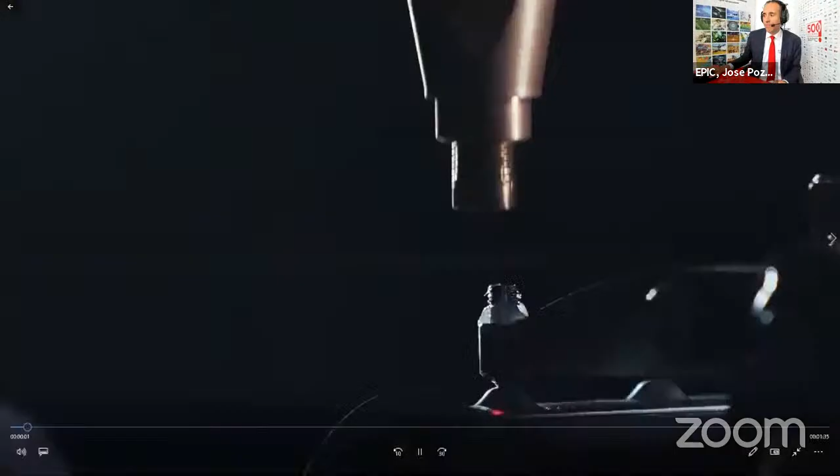Industry 4.0 is increasingly dependent on robots for high-speed, high-strength automated welding. The EPIC online meeting on Friday 19th will explore the state-of-the-art in laser beam welding. This is a topic that fascinates me. I even tried this myself. Heat is required to fuse metals. In laser beam welding, we use light. An extremely powerful laser beam strikes on the metal and melts it. But there are still many challenges.

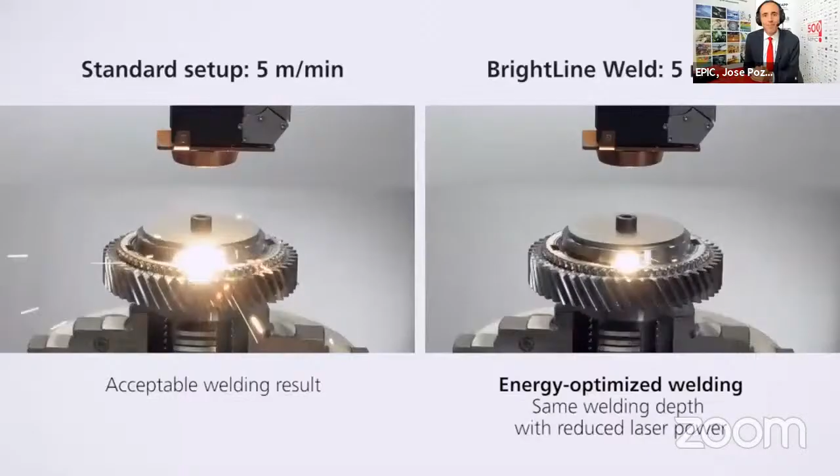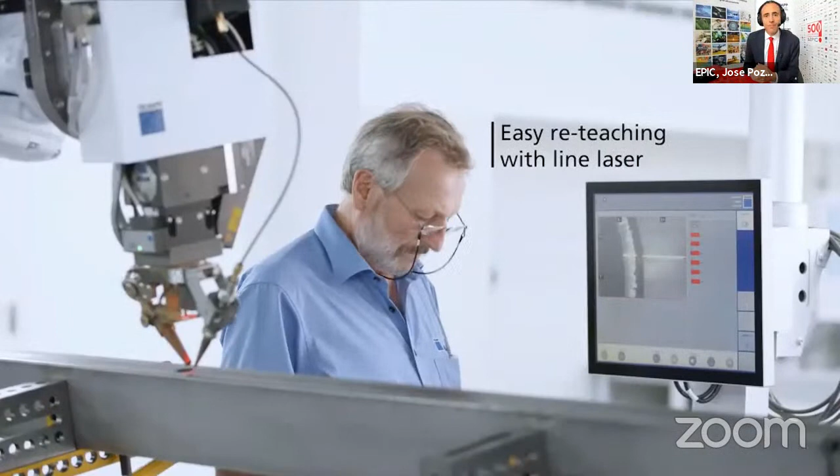For example, the use of the right beam shape for each material, the smooth welding of different materials with different cooling rates, stability, maintenance cost. So let's bring the entire supply chain on both key segments for laser welding, automotive and metallurgic industries, and let's understand what demands they have from the supply chain of photonics, from fiber to optics, from ruby lasers to YAG lasers. It is all about making business while addressing challenges.

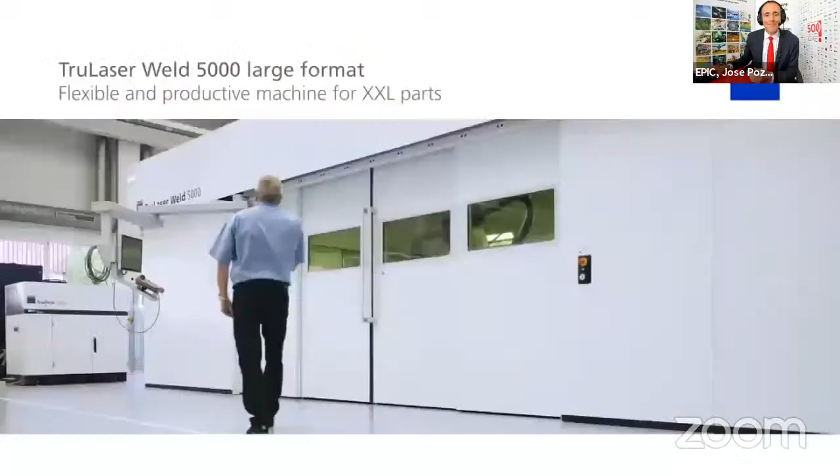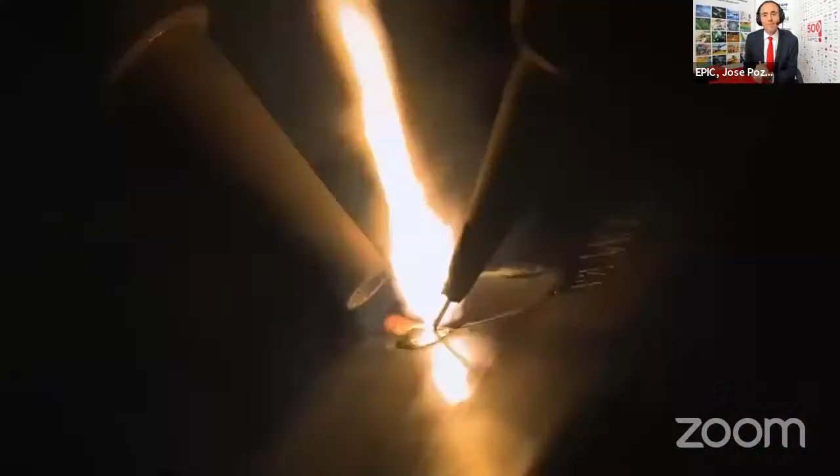This is a very important sector for photonics. I am delighted that the market leader Trumpf will be there. How will collaboration between manufacturers of lasers and beam delivery systems grow the market? Sign up to participate in Zoom or follow us live in YouTube. Be laser focused on the discussion on Friday, June 19th at 3 p.m. Central European Time.

And it is Friday, it is 3 p.m. Central European Time, and here it is in front of us, the full supply chain on laser beam welding. It's a fantastic day for me, for Francesca, and for Antonio, because as you may know, lasers fascinate us, and this is incredible to have this meeting today.

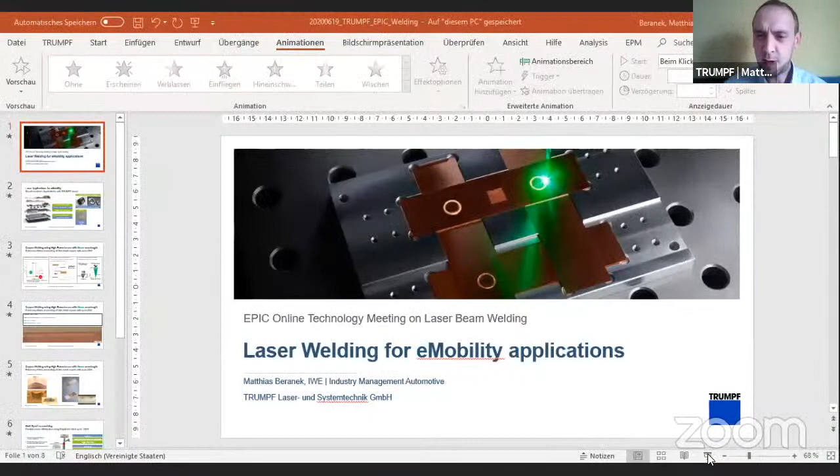All right, thank you very much. Good afternoon to everybody. I've already seen a lot of familiar faces. And also I would like to greet the attendees out there. I've learned that I only got like 6 minutes or something like that, so it will be very quick.

I just will show you what we are mainly concerned with talking about laser welding these days. As you can imagine, and a lot of you know that, there's a lot of stuff going on in e-mobility. So you can see here in the green boxes what are the main application fields, like power electronics, battery cell and module assembly, the battery container, which is actually a car body part. We have a lot to do with hairpin e-drives and also the rest of the drivetrain components. And also we are looking into fuel cells at the moment. So there's pretty much everything.

I think that there is a huge shift from what we've seen in the past, like steel and aluminum welding, to mainly copper welding. So this is something we're looking particularly into. And for that, we have elaborated a whole new laser lineup, which are the green lasers based on the disk platform by frequency doubling. Reason for that being, as you can see here, absorption of copper in that wavelength green is 40%, so it's much higher than infrared. And this gives you much better handling of those welding applications.

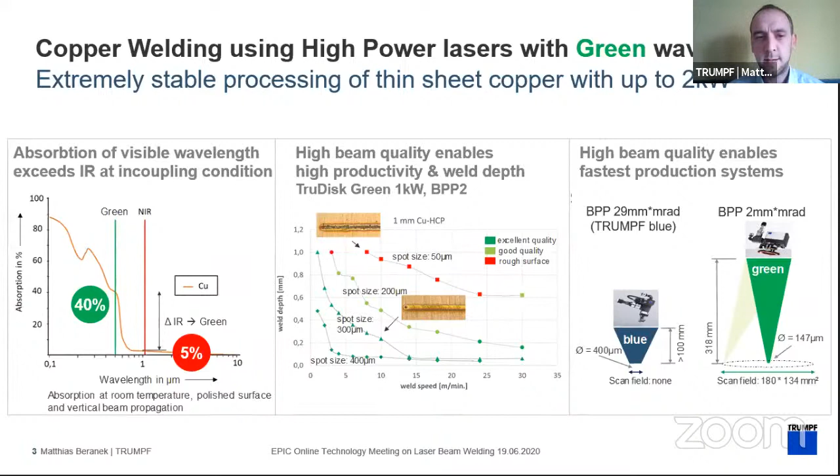And we have also found that we have to have a very high beam quality, as shown in the middle. So you can see different welding depths where we are very fast in welding, but this is only achievable having that high beam quality, which we maintain from the disk platform. And also what speaks for the high beam quality is the system technology, which is on the right side. So we've tested everything in visible wavelengths, meaning we also have a blue laser in Trumpf, but it turned out that we cannot use what we want to use, which is scanning optics for our fast processing. So high beam quality and green laser light enables and improves the copper welding applications.

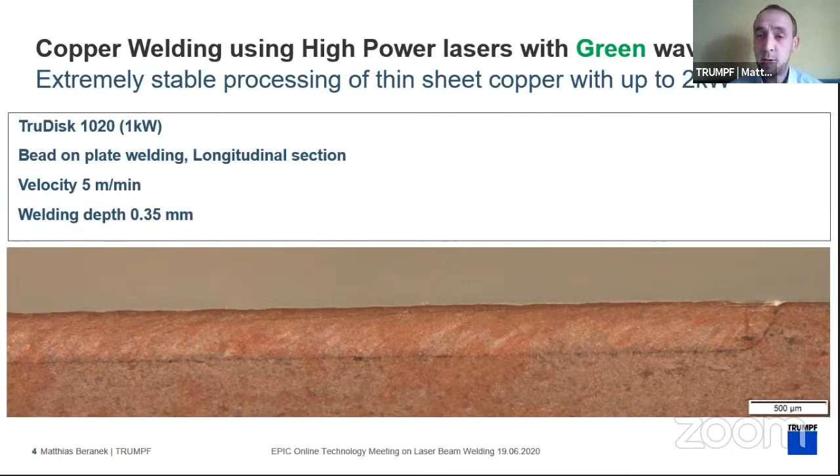We talk about comparably shallow welding depths, like in this case 0.35 millimeters in bead on plate copper, but with a very extreme stability of the welding depth. And this cannot be achieved with infrared, but only with the green one. And this is something very new. Also, we see the classical battery cell applications like foil stacks will become feasible with those green lasers, as well as the mixed metals, so aluminum with copper in that case, where we just want to have extremely stable welding depths in order to maintain that. Another major breakthrough technology is actually multi-spot laser welding.

In our case, we call it BrightLine Weld. That is the Trumpf name, and we've also originated that technology up to 16 kilowatt. As you can see, we will use a 2-in-1 fiber guide. That practically means you will be using 2 spot sizes at the same time with a certain power distribution at different sizes. The main effects of that being most notably a stabilization of the welding process, which means the keyhole dynamics, and so on. And this results typically in a significant spatter reduction, minimization.

It is suitable for all materials we see in e-mobility and, of course, other industries. In steel, we will get a high speed gain, which means exceeding 20 meter per minute, 30 meter per minute welding speeds. This is extreme and crazy what's going on here, as well as having a higher efficiency, meaning power can be reduced to achieve the same welding depth.

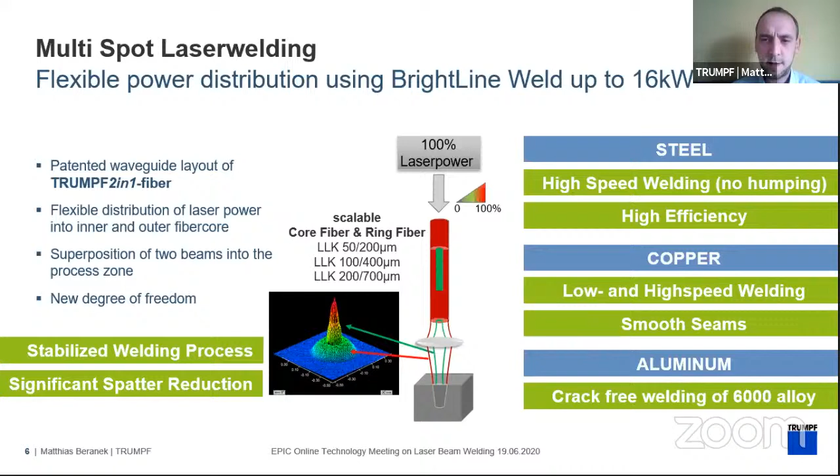And in aluminum, we've seen that we can have crack-free welds for the 6000 alloy, which a lot of people are afraid of. So this also improves that. And this is just 3 examples of what we do with BrightLine. So in comparison to the green laser, where we have heat conduction mode welding, BrightLine, especially in combination with copper, is meant for deep penetration, higher penetrations.

One thing maybe regarding the community, and this is my last sentence here, is that for most of those applications, we have to bring together multiple things, one of which is, of course, the beam source, the fiber guide, but also application know-how and sensor technology, including data handling, interpretation, making the processes smarter. And this is where we have to work together more closely in the future. And this is the path, what we will be seeing.

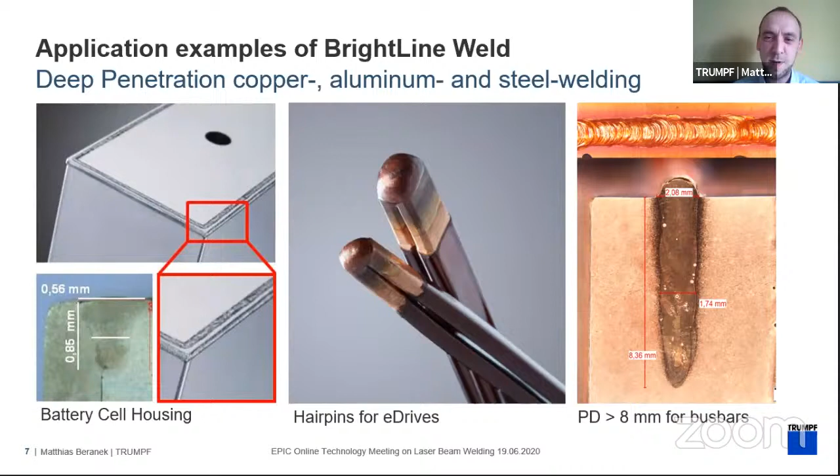So it's really clear you didn't have the typical EPIC questions, what can you do for them? What can they do for you? But you already mentioned basically the full value chain could help you. So that's already in one sentence the meaning of EPIC. So the full value chain is here. So maybe someone of these people belonging to the value chain wants to comment or ask questions to Matthias. What is it?

So now they are all shy, but then I know Rodrigo is writing something because Rodrigo is our monitoring system guy. So welcome, Rodrigo. Can we start with you, maybe to introduce yourself and say how you can help Matthias. I guess you have a couple of things to tell him.

Yeah, thank you. For those that don't know about us, we are a manufacturer of high-speed infrared cameras. We are a Spanish company. And we have cameras that are introduced in the production line to monitor welding processes in real time and to assess the quality also. We have made many collaborations in the past with many companies, especially for welding of similar and dissimilar materials. And for example, with AIMEN, we have made the integration of our camera together with a deep learning system that is capable to detect defects in real time.

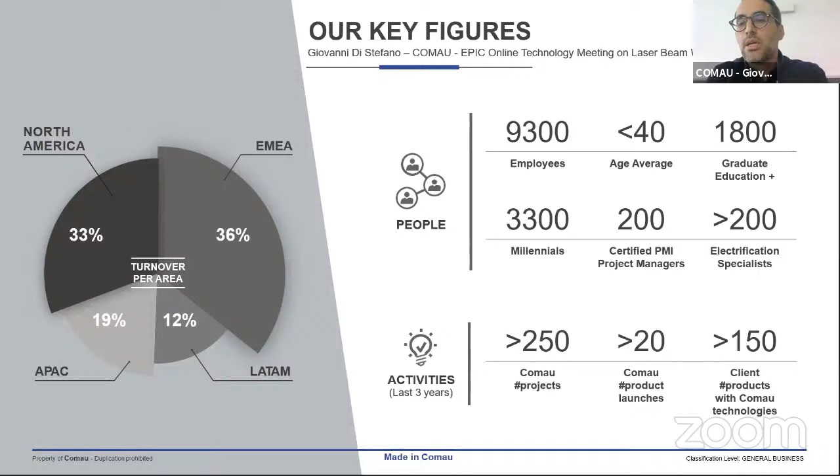For what concerns activities, we decided to share some numbers about the last 3 years that were very successful: more than 250 projects, more than 20 new products launched, and more than 150 customers with our Comau technologies.

For what concerns laser technology, we started working on it in 1985, so we have been one of the pioneers of laser technology. We worked a lot in the automotive industry, but we are trying to move forward in a more general approach.

These are sort of specific consultancy that only companies like Comau can provide. Our greatest level of expertise comes from our roots: body assembly, machining, powertrain assembly jobs. But as I said before, we are moving forward in the electrification market.

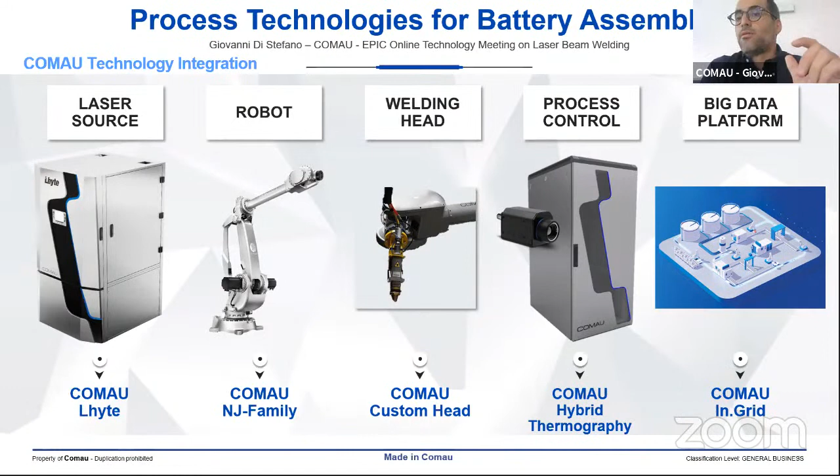Not just granting the mechanical strength of the joint, but concentrating as much as possible on the electrical performance of the joint as well. To do this in the best possible way, we decided to integrate our hybrid thermography, which comes from a huge investment we made last year by opening our own software development center in Bari.

We're working closely with the Polytechnic University of Bari to create a software house dedicated to developing new software that lets us use artificial neural networks to analyze videos collected in real time by infrared cameras. This way we can understand, without any destructive test, whether the quality of the joint is good or not, granting good mechanical performance as well as electrical performance.

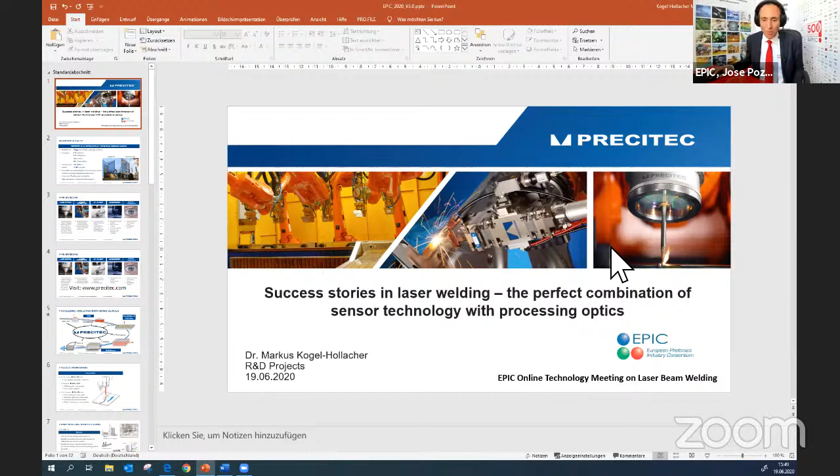Thank you very much. As you may see, this is my first Zoom conference, we typically use different tools nowadays. Let's start with the topic of this afternoon, which I want to present to you: some success stories in laser welding, and to show what is important. And important is the combination of sensor technology with processing optics.

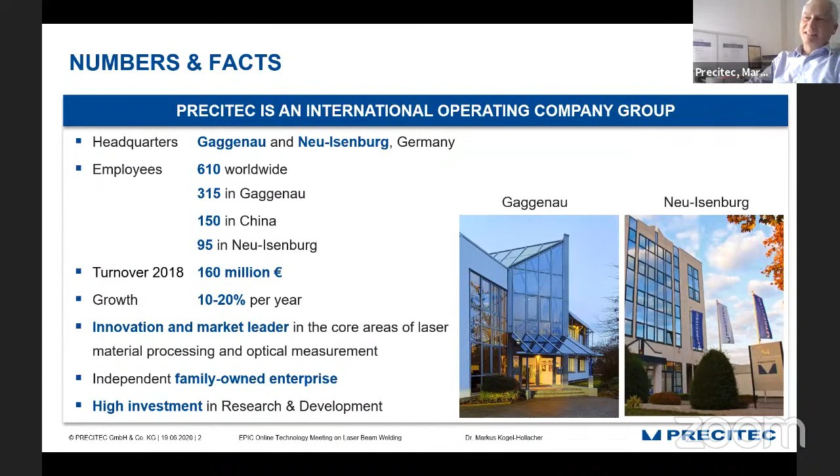Just a few words about Precitec in 2020, or 2019 more or less. You see that we have nowadays 610 people working for Precitec worldwide, so this is quite impressive. If I remember the days 25 years ago when I started here, it's completely different from these days. And yes, we have a quite respectable turnover and growth like everybody. Let's see what happens in 2020, the numbers for this year will be different. Nevertheless, this is what we are working on.

I don't want to talk too much on that because it's definitely easier for you to go on our website and see the divisions Precitec is active in. Just to let you know, we are two companies in Germany: one in the region of Karlsruhe, which does the laser materials processing stuff, and the other one in Frankfurt, which does measurement stuff and medical technologies. And so what I do is bring both expertises together.

So let's start also with a very important subject these days, which is e-mobility. We as laser people, we as people in the photonics industry, we are quite happy to have that challenge nowadays, because we do not have to compete that much with existing technologies. We can design applications right from scratch with the laser as a tool, and with sensor technology to supervise, to control these processes. And you see, this is more or less the content of my talk.

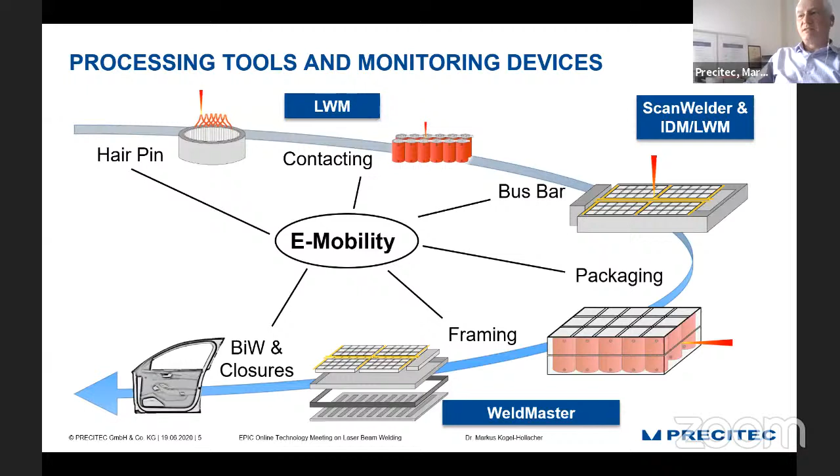I want to go from the top to the bottom to bring a few ideas on laser processes in hairpin, in contacting, in busbar welding, packaging, and also body in white applications to you, where we already have running applications. You will see that not for all the applications I'm allowed to tell you the customer behind, but in the end you will see a few of the customers at least which we are working on. So we think at Precitec we do have a solution for all these applications in e-mobility.

So let's start with the topic of process monitoring. The devices, the tools we have developed over the years are highlighted in blue here. They are called WeldMaster, they are called IDM, LWM. These are the systems and the names we gave to the systems. And those who are familiar with laser processing and also familiar with process monitoring know that we divide the process region into pre-, in- and post-process regions. So these are the areas where we can apply the sensor technologies to.

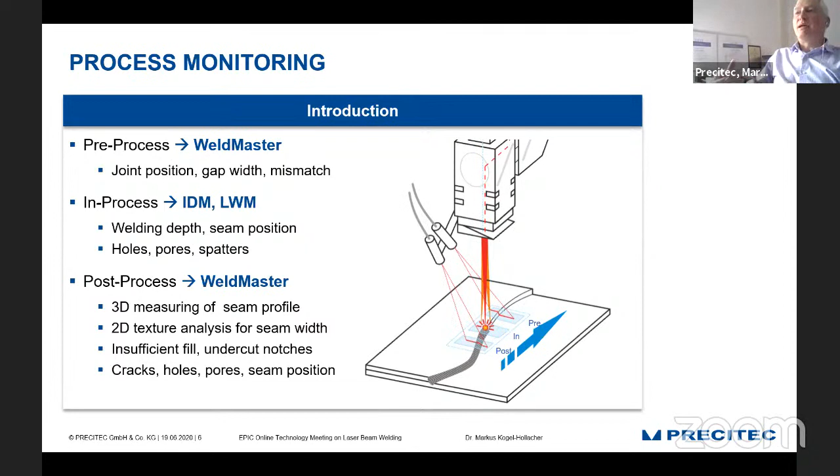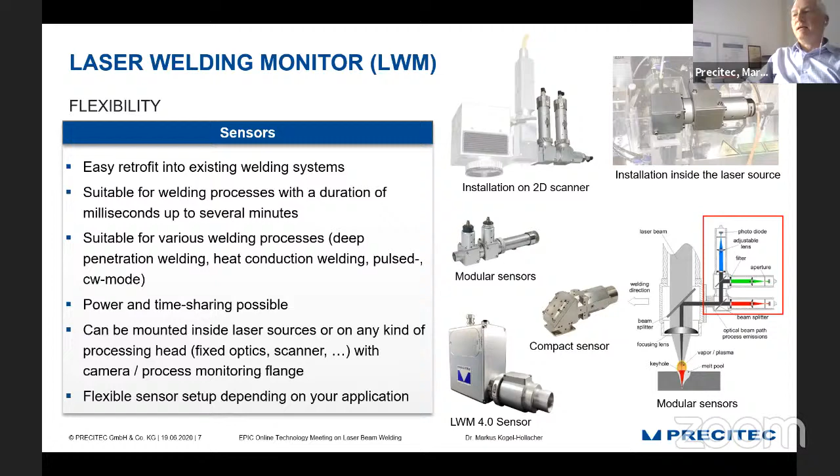Let's start with the LWM, laser welding monitor, all-time favorite, a rebirth more or less of that sensor technology. Just started a few years ago. We have a lot of applications running right now with the old-fashioned sensor technology based on photodiodes. Nevertheless, it's quite easy to retrofit existing welding applications, welding systems with this sensor technology. And we are the ones which try to bring more than one sensor into these applications, sensors covering different areas of the wavelength band in order to see more than just one possible failure, one possible error which can occur during the welding process.

And just one application in battery contact welding: you see the laser welding monitor mounted on a third-party scanner. And additionally, you have the camera port, so it's possible to also adapt any kind of camera, for example NIT cameras, to these devices. The application behind is in production since 2018. As I said, I cannot tell you the customer behind, but for those who are familiar with battery contact welding, it's not that surprising that it's copper to aluminum or copper to stainless steel welding or aluminum to copper.

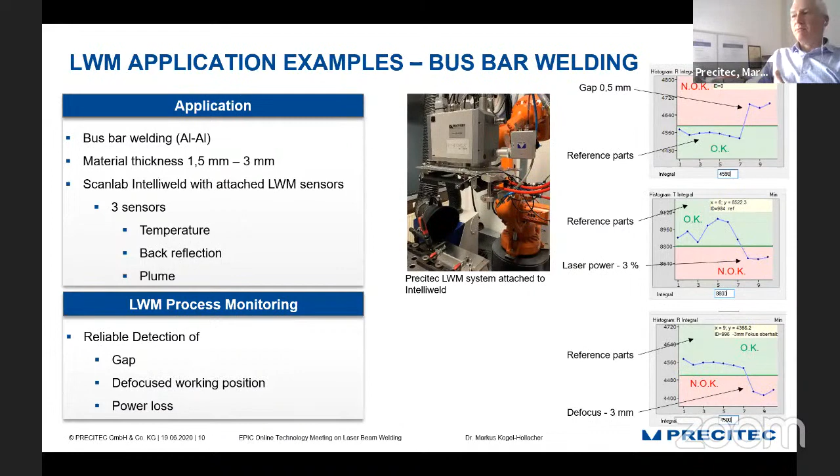Another application is busbar welding. What you see here is a little bit underneath the surface of the laser welding monitor, where we have a lot of statistics, and you see here three typical problems which can occur in these applications. It's a gap between the sheets. It's a laser power drop, which can occur, as was mentioned before, because of contaminated protection glasses, or a defocusing, which happens because of misalignment of the part. And you see that different sensors, in this case temperature and back reflection sensors, can catch these errors very dominantly, and can distinguish good from bad parts.

We also already talked about coating. Coating is very important, not only when it comes to different colors of the laser sources. It also is important when it comes to different sensor technologies, which use specific wavelength bands for their supervision. So that's why coating is a very, very important topic these days, also when it comes to monitoring devices.

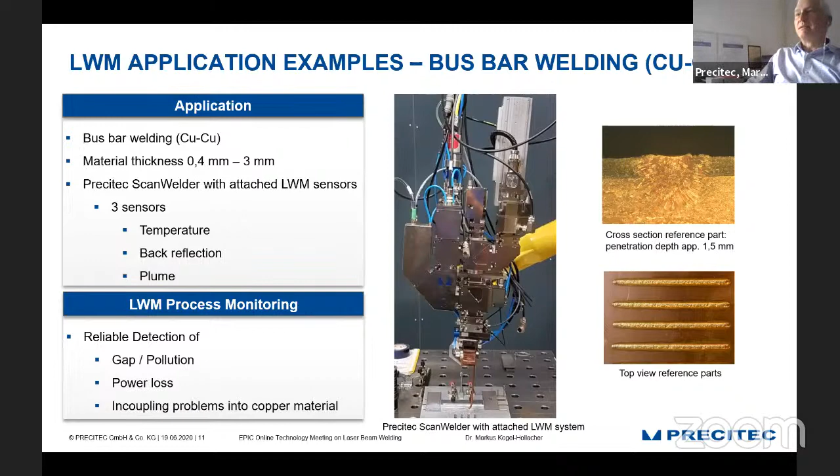One of the monitoring devices which has to come in presentations I do is the use of OCT technology in laser applications. In Precitec, the sensor is called IDM, in-process depth meter. When we started with that technology, we thought maybe it's important for customers to know the penetration depth. What we see right now is that penetration depth is important, but not the most important thing you can do with OCT technology. Nevertheless, what I will show here are just a few examples of penetration depth measurement.

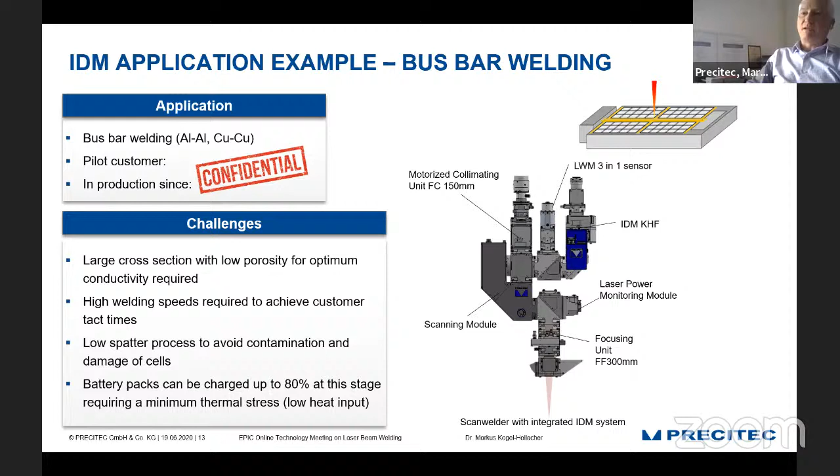So again, busbar welding, again the scan welder of Precitec in combination with the OCT sensor, and a device which we call keyhole finder. This is a new device which comes with the OCT system to align the sensor spot, the measuring spot. You have to be aware of the fact that we are talking about a diameter of the measuring beam of about 50 to 70 micrometers. And the alignment of that measuring beam is very, very important. That's why we need some devices to help the customer align that measuring beam to the right position.

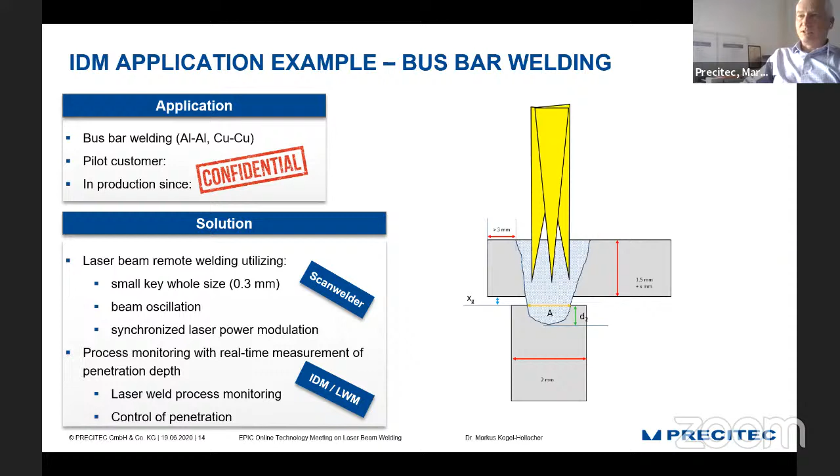And you see here in the busbar welding, we can easily do some penetration depth measurement. Even if the keyhole is very small, even if the penetration depth is very small, we can adapt that OCT technology to these applications. You see here aluminum to aluminum or copper to copper. So what is very important to know is that the process emissions do not disturb the measurement. And we can measure penetration depth or topography or whatever you use the OCT sensor for in micrometer resolution.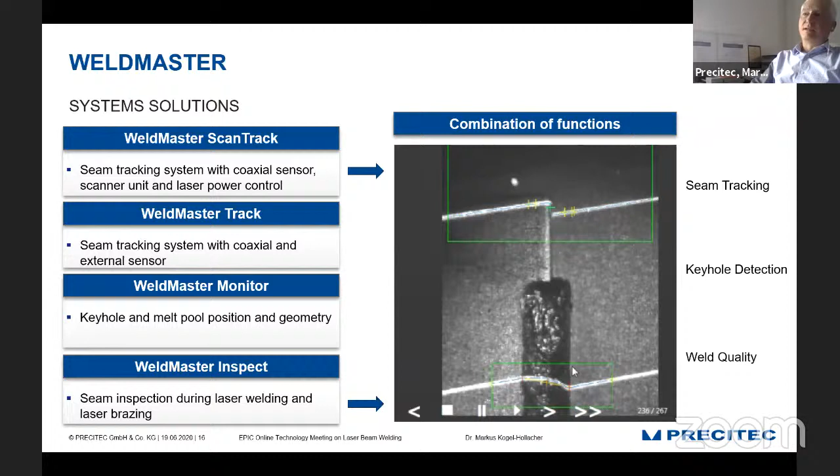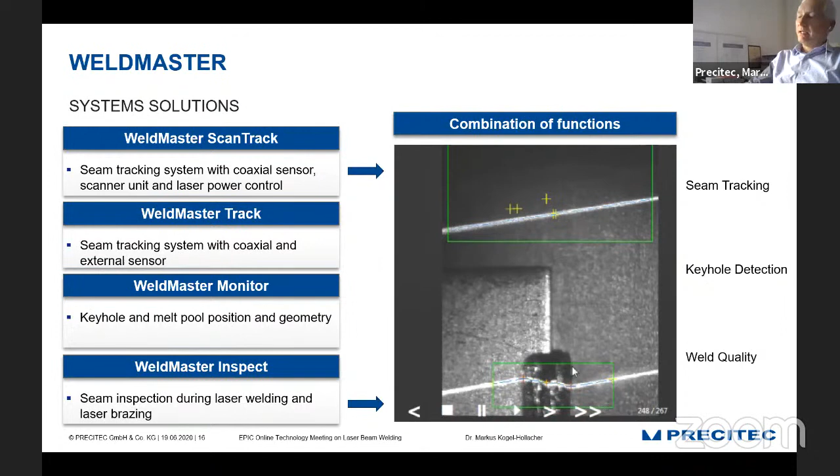Now it comes to the last device, what we call WeldMaster. This is a camera device which is looking coaxially to the laser beam. What you see here in the video is the view directly into the interaction zone, which comes with two projected laser lines which do seam tracking or weld quality topography measurement. This all is the WeldMaster system, which you see here in a sketch. So again, a Precitec own-built device with a 1D scanner. And what we can do easily with that 1D scanner is to oscillate the laser beam.

Those who are a little bit familiar with laser welding know that some of the applications need a stable keyhole, and you can stabilize the keyhole by very fast oscillation of the laser beam. And also, if you do lap welding, what is displayed here, it sometimes helps if the gap is varying that you are able to oscillate the laser beam in order to bring some material from the top sheet to the bottom sheet. And this all is possible with the WeldMaster ScanTrack with all the inspection and monitoring systems.

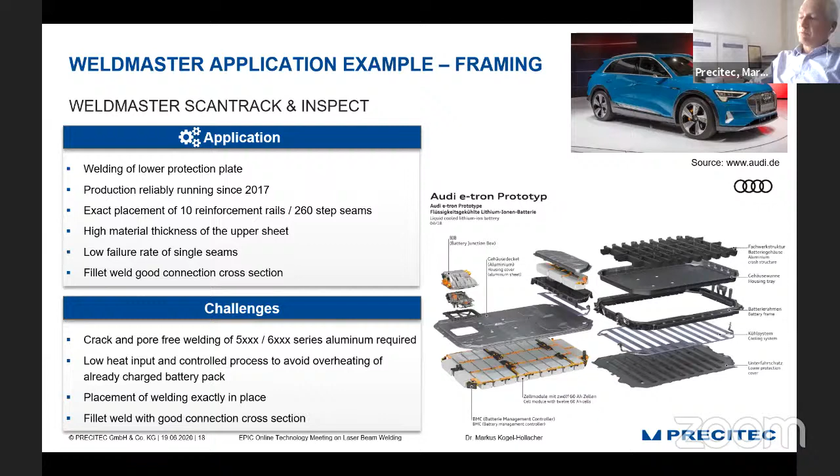And the customer behind is Audi. We have one application running since 2017 where we use that device in e-mobility to close the battery cell module, which is mounted underneath the Audi e-tron. You see here in the application, it's 5000 to 6000 series aluminum, and that requires some oscillation of the laser beam and some controlled process power input. That's why we not only oscillate the laser beam, we also control the laser power. This is what we do since 2014 also on the Audi A8 doors. This is also 6000 series, and by oscillation of the laser beam, we can do pore-free and crack-free welding. And what is very important, there is no additional material, no filler wire needed in that application.

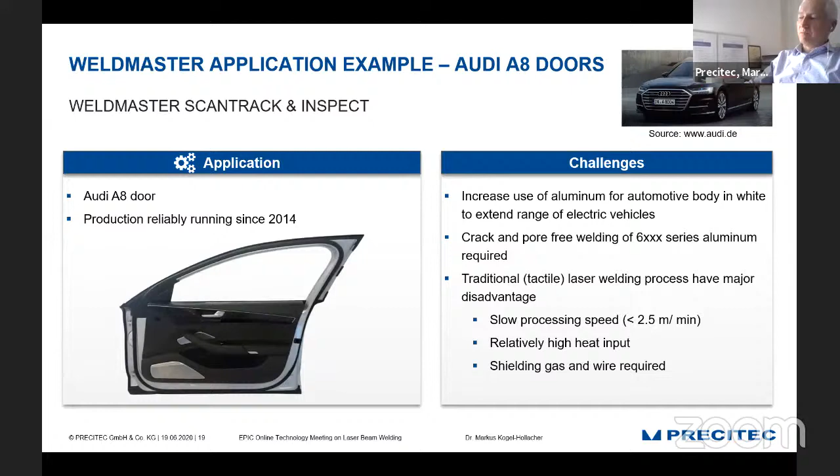So these are the customer benefits which come with that application, which was presented several times by Mr. Weberpals from Audi, with the use of the oscillation and getting rid of filler wire. There is a heat reduction of 47%. The reduction of the investment cost is quite remarkable. Running costs can be saved, and there's a lot of time saving. And additionally, by using the inline control of the WeldMaster system, there's no additional station needed for a quality check.

So just to close my presentation, some messages for you, hopefully to take away and to remember longer than this afternoon. We see that there is a high diversity in laser concepts, and these specific applications ask for specific laser usage and specific processing components. And we as Precitec see that modular design of turnkey systems is the solution which we can provide to customers.

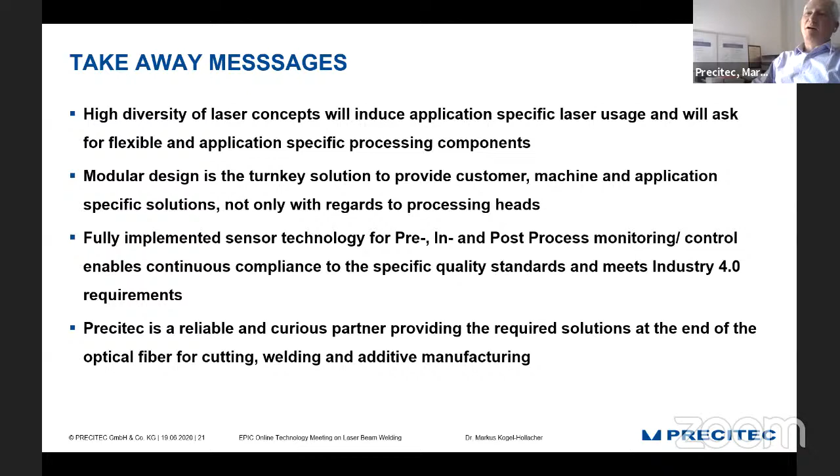As we are able to fully implement sensor technology for all the important regions, pre-, in-, and post-process regions, we can help customers to really bring very high quality standards in their application, which also meet Industry 4.0 requirements. And we still see our company as a reliable and curious partner, providing the required system technology at the end of the optical fiber. So any laser manufacturing company is happy to work with Precitec components.

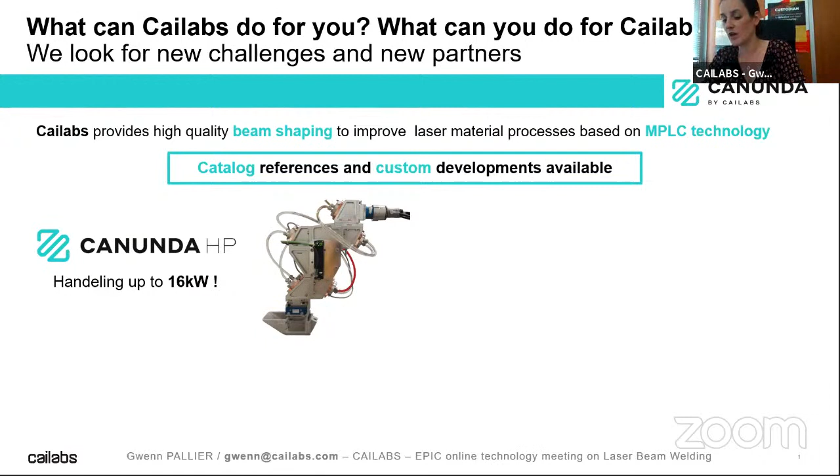Well, basically, we are looking for new challenges. And I'm very sure that actually Markus has many in his head. We are looking for end users who want to try new kinds of shapes to improve the processes, or who want to collaborate within very large projects. So if Francesca, you allow me, I will have one question now for Markus. Markus, you do a lot of R&D at Precitec, and you are always trying to improve all the processes with new features. What would you expect from laser beam shaping to bring to laser beam welding?

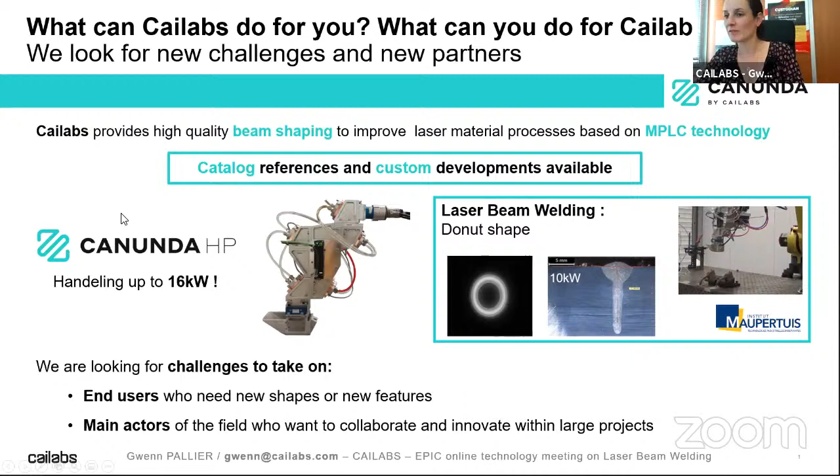Gwenn, for those who don't know that Cailabs and Precitec are working together, they can come to a different webinar on Monday.

So I always say that there are the research institutes, and we do have some research institutes here in the group today as well. Research institutes are the ones who are responsible for programming some kind of GPS system for photons. So the research institutes have to say, what is the best position for the photons to hit the workpiece surface? And Cailabs is the one who is taking over that information from the research institute, building the MPLC system in order to fulfill the demands of the research institutes. And that MPLC system is adapted to a Precitec welding head, and then we fulfill all the important applications which are coming today or in the future.

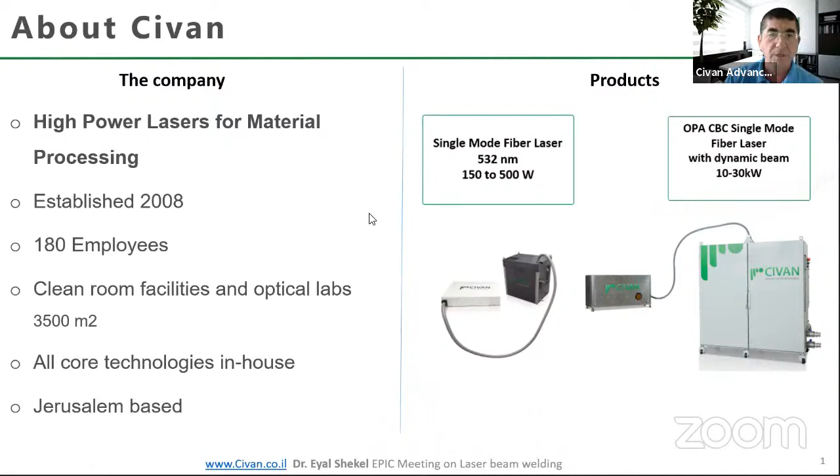So really the core technology is coherent beam combining, which means that we can take many amplifiers and combine them together to have one single mode output. But in addition to the fact that it's single mode, we also have control of the beam position, beam shape, beam focal distance, and so on, because we're using a technology called optical phased array. Optical phased array means that many lasers are shining together on a common far field, and in the far field you create a diffraction pattern that by controlling the relative phases, you actually control the shape and position of this output beam. So this output beam is a single mode output, but the position, shape, focal distance, and so on can be changed.

So here you can see a few examples of just any arbitrary shape that one would like to do. We're showing here some shapes that many people are doing, like the wobble, the H shape, a circle with some intensity in the middle, but then you can have 1 point, 2 points, 3 points, 4 points, 5 points, really any arbitrary shape. And just to show that, we show here our logo at the 14 kilowatts output. And of course, I don't have to explain too much the importance of this beam shaping and beam wobbling. So I just show here a few examples from our application lab showing different cross sections of bead-on-plate with different beam shapes.

So the way we are different than any other method of beam shaping is, first of all, we can do any arbitrary beam shape. It's absolutely, so to speak, random access. Whatever you can draw on a piece of paper, we can get close to, at least in the shape. I'll show in the next slide something about this. We can change the frequency of oscillation. So for example, if you want to do a wobble, you can do it at kilohertz or you can do it at megahertz. And all you have to do is choose on the computer what speed you want, and it happens.

Another very interesting thing is that all these changes between different beam shapes and different focal distances can be done on the fly. So if you're drilling two materials and want to go from one to the other through the interface, you can change the beam shape every microsecond. You drill with one beam shape in one material, adjust the parameters through the interface, and then change again in the other material. And of course, for welding and cutting, it's the same idea.

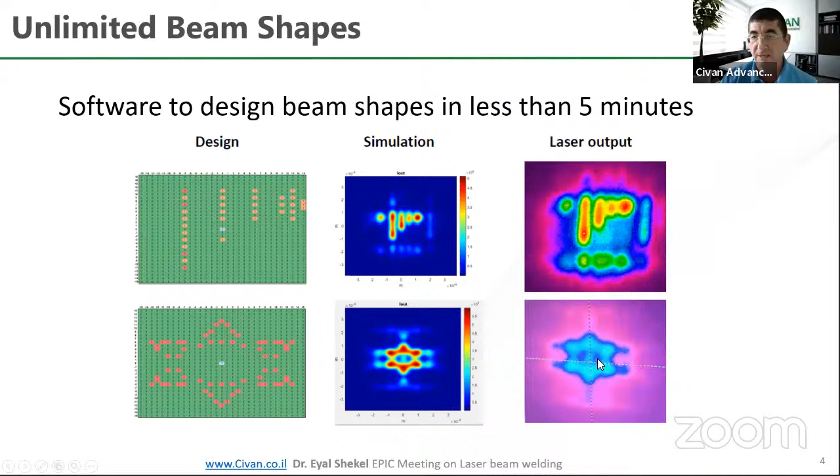For example, you can see here our logo, the way we designed it compared to the simulation. You see there are lights in places we didn't want them, but at least you know in advance what the beam will look like. Here you see it at 14 kilowatts, very similar to the simulation. And here's another example, the Star of David - you do the design, get the simulation, and in real life you get a very similar result to the simulation.

The point is, I don't have to tell this audience that every specific process and every specific material needs a different beam shape. Cutting is different than welding, thick material versus thin material, stainless steel, aluminum, titanium - any material needs something else, and every process needs something else, because maybe it's a crack sensitive material, maybe different parameters you have to control.

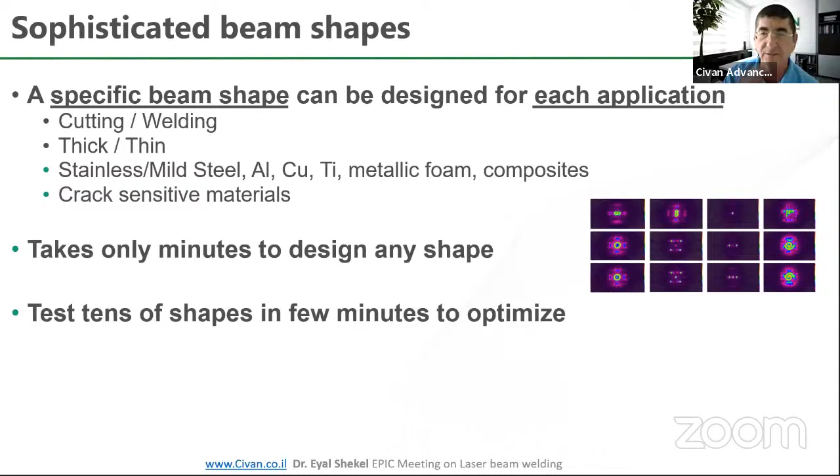But the point is, with our laser, it only takes minutes to design any shape you want, and then you can really do tens of shapes. You design the shape, put it in the menu of our laser, and with a pull-down menu you can choose any shape. In a matter of minutes, you can test tens of different beam shapes - no need to change any optics, no need to change any mechanics. Just by pressing a button, you change the shape, change the frequency, and so on.

So this is for designing processes, and of course, maybe in the future, some of the things that Precitec mentioned - you can do on-the-fly monitoring, and because we can do on-the-fly beam shaping and change all the parameters, you can actually in real time close the loop. As you monitor the process, you can actually change the beam parameters on the fly to improve the process.

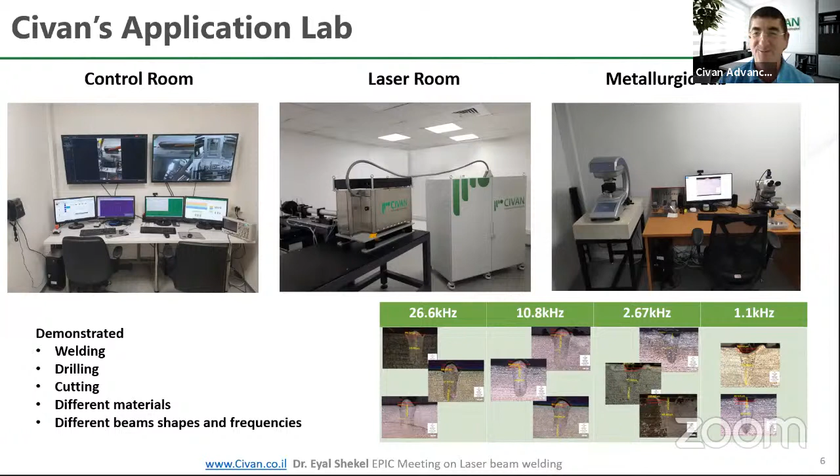It's fascinating, your spatial light modulation is just out of this world. I was impressed - I really cannot believe what you can do with a beam shape. Are there any questions for Civan?

Because I really want you to meet some of my friends, you have to come more often to the EPIC meetings, and I have to go more often to Israel. As soon as things go back to normal, I'm going there. I want you to meet the people I have in the specialty fiber business. I'm going to go to France, to my favorite guys from iXblue.

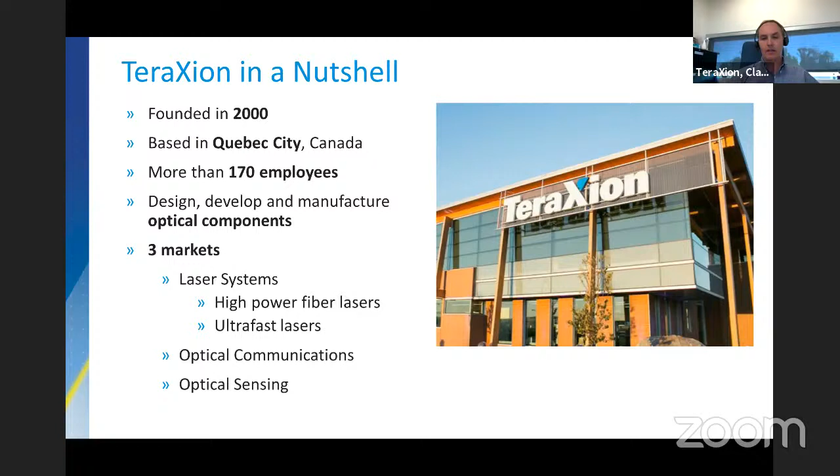And also we have activities in optical sensing with specialty semiconductor lasers and specialty filters. We provide components for LiDAR, wind sensing, and autonomous vehicles as well. We have three main technological expertise: we are experts in fiber Bragg gratings, that's our main technology that founded the company; we later acquired expertise in low noise lasers, semiconductor lasers, ultra narrow lasers, and highly stabilized lasers; and we also have a sizable chunk of our activities in integrated photonics.

Now, for the high power fiber lasers, which is where we're a player in the welding industry, I will assume that a lot of you know these configurations, but also that some of you might not be so familiar with it. So in high power fiber lasers, the basic building blocks combine these single cavity configurations.

We combine several of them to output the high level of power that were mentioned earlier in other talks. So a single cavity can go up to 2 or 3 kilowatts.

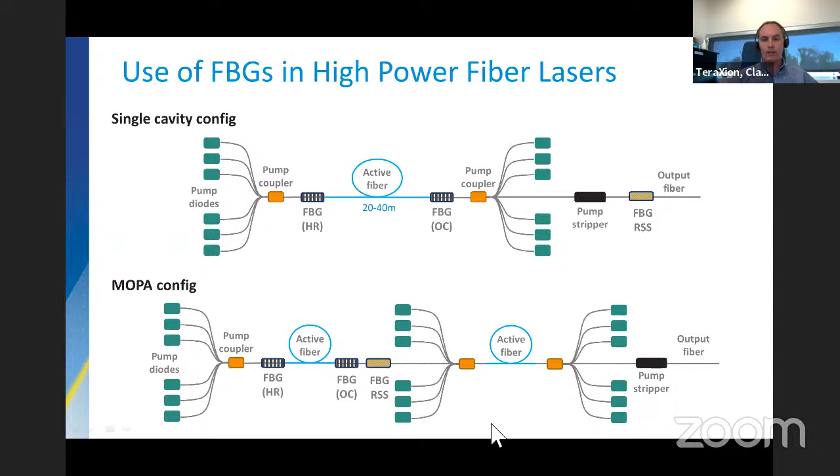What are the challenges in the high power fiber lasers? If we take it on the industry process requirement side, the industry is always seeking highest throughput per dollar, and what is required of the laser is to have low dollar per watt in essence, and that's where we have benefits with the Raman suppressing filter.

When you reach the high power, you run into nonlinear limits with the Raman scattering. To address this limitation, by suppressing the Raman, you can increase the output of your cavity without having to go to, in some cases, more single cavities combined together. So in essence, you can use fewer single cavities to get to the final output.

Another industrial process requirement is, and this is something that was addressed today by several presenters, the processing stability, which is key for the welding. And at the laser requirement level, it needs to have high power stability and also high beam pointing stability.

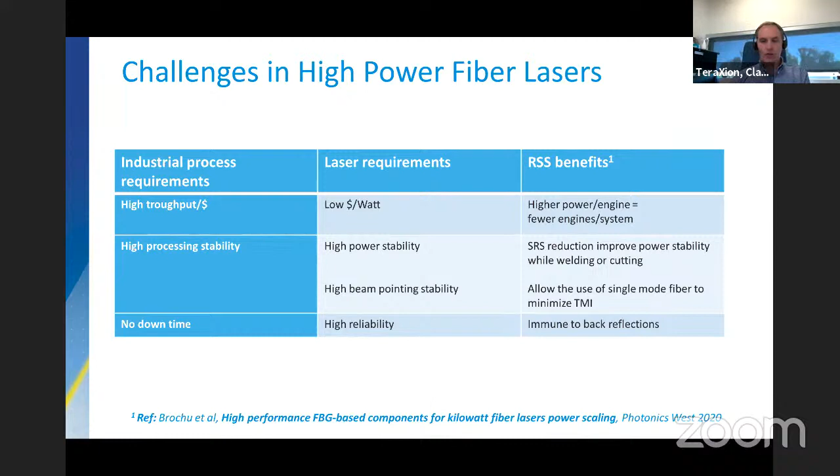The high power component, when we look at the fiber Bragg grating themselves as a reflector in a cavity, the products we're designing and manufacturing have the capability of handling power up to 3 kilowatts depending on the fiber type. We're working with different popular wavelengths: 1 micron for ytterbium lasers, 1.5 for erbium, and 2 micron for thulium lasers.

We also work with different fiber types and diameters. We work with cladding diameters from 125 to 700 micron, and even outside of these, but those are the most common ones that we are a player in.

The Raman scattering suppressor, as I mentioned, enables the power scaling of your laser by outputting the unwanted wavelength of the Raman outside of the core of the fiber, and by doing so, it will improve your laser stability, since the Raman band will use up some of your desired wavelength as a pump to the Raman.

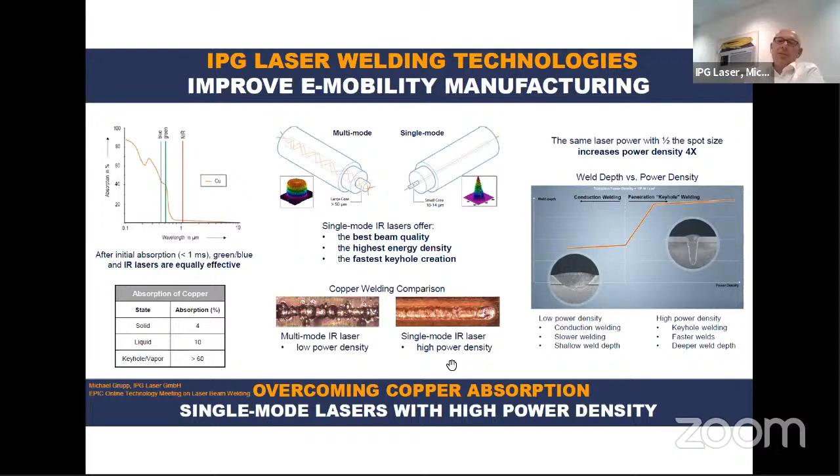So we can create here keyhole depths of a few tenths of millimeters up to a few millimeters, 3 to 4 millimeters. Thank you. Next slide, please.

So this was the one technology, the single mode lasers, and the other technology I already mentioned is our new technology of the adjustable mode beam. So we get a very broad range of beam profiles. This means we can separately adjust the power in the ring. We can separately adjust the power in the core and play with these parameters to optimize our process. In this way, we can create wider weld beads, narrow weld beads. We can increase the quality of the weld seams. We can create really high-speed welding, and we can get consistent welding in thick and thin copper.

Another option to optimize this weld quality, which is always the main key in copper welding, is to apply dynamic beam shaping. Dynamic beam shaping means that we apply scanning heads or wobble heads to move the beam very fast. It is known that a fast movement of the laser beam stabilizes processes in copper welding. And this is what we can do in a very limited space, for example, in a small circle or small lines, to get really reliable high-speed welds on these highly reflective materials or dissimilar materials.

So we get very aesthetic finishes of the welds, for example, for sealing of battery cases, for connecting battery tabs to the battery cell, and stuff like that. So this is really consistent, very stable processes at very high speed by means of the scanner. So we can produce, for example, several tens of welds within 1 second on a cylindrical battery cell.

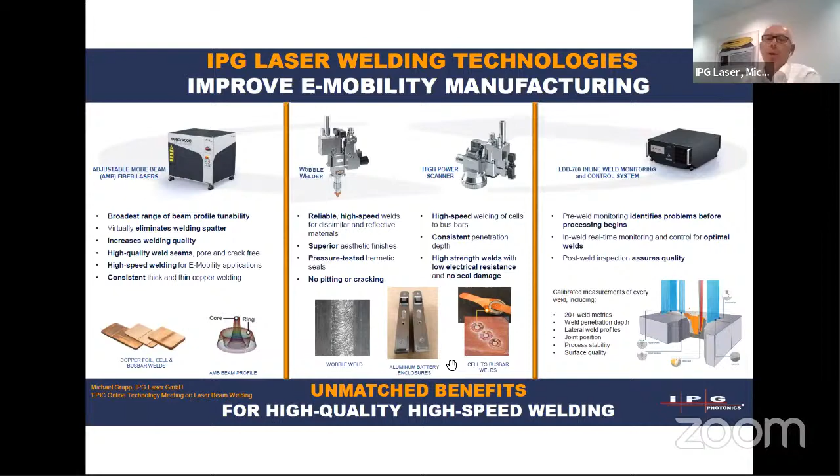So if we summarize all this, we have quite a nice technology with available lasers. As I said before, the initial absorption rate of our adjustable mode beam laser, but also of our single mode beam lasers in the infrared, is much lower than for green and blue lasers. But as soon as we get a keyhole created, we have the same stability and, let's say, the same absorption for the wavelength. But when we use the infrared technology, this is a proven technology.

These are lasers which are produced in really high numbers. The initial cost, that means the cost of ownership, the investment costs, are quite low compared to this new technology of the green lasers, of the blue lasers. These are field proven and reliable technology. For 10 to 20 years we have had these lasers in production. We can scale the power from a few watts up to 25 kilowatts. All is available, with different beam qualities.

We can create very high welding speed as we have a lot of laser power available. We get deep penetration, very high penetrations, as we can have very high power rating and high beam quality. We can control the interface by our scanning technologies or by our AMB technologies. And we have a lot of available standard laser components. This means welding heads, scanning heads, and other technologies, which are mainly optimized for the infrared wavelength. This is all available. There's nothing new, nothing which has to be invented.

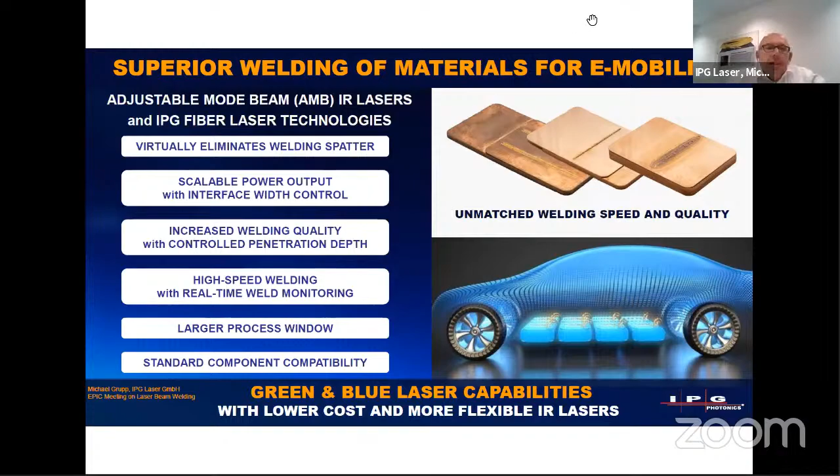Thank you very much, Michael. That was a great presentation. This is your EPIC re-entry. You've been here before, but this is your EPIC re-entry. EPIC has changed a little bit. Now it's about cooperations, collaborations, working together. What can you do for them? What can they do for you?

Yes, what can we do for you? As IPG, we can, of course, demonstrate our systems to you. We can give you the opportunity to visit us, to test our optics, to test our lasers. We have the full range of beam sources in our application labs worldwide, so you are always welcome to make tests together with us. What can you do for us? Of course, you can support us with your technologies, your optics, your devices, to serve our customers, to make processes better, to make our customers happy.

And your customers are already very, very happy. You have great lasers. One thing I would like to ask you is to select one challenge for this audience, one thing where you think, if I finish this meeting with a potential cooperation on this aspect, I'm going to start a great weekend. That's not so easy to say one thing. I think it's a great opportunity to have all these specialists and experts together, to know each other, maybe to see each other for the very first time, and make communication and relationships easier. And after the meeting, I'm going to make a lot of introductions, and people are going to get to know each other. I'm going to introduce you to a very good friend of mine. Ciao, Fabrizio. Come va? How are you doing today?

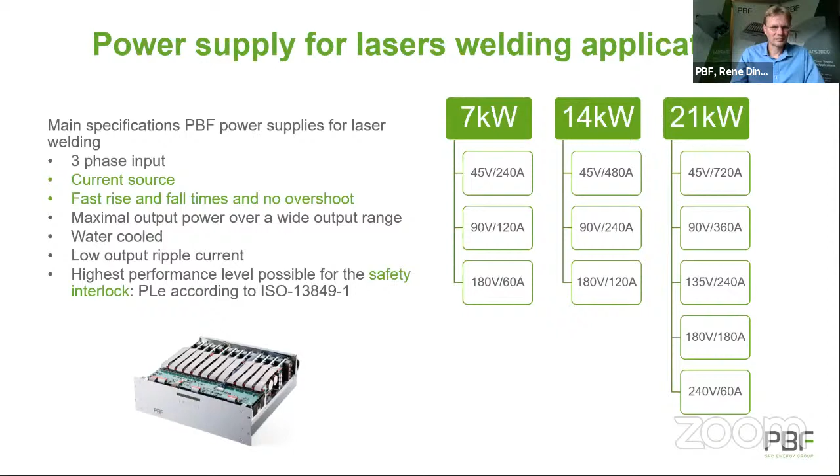As I mentioned, we have a safety interlock integrated in our power supply. And first I'd like to show you how many of you probably do it right now. You have a big contactor, and probably you have two because of the high level of safety that you want to achieve on your system. And you have a sensor that can be a door sensor, a push button, or a computer, whatever, telling the e-stop relay that you have to power off your system.

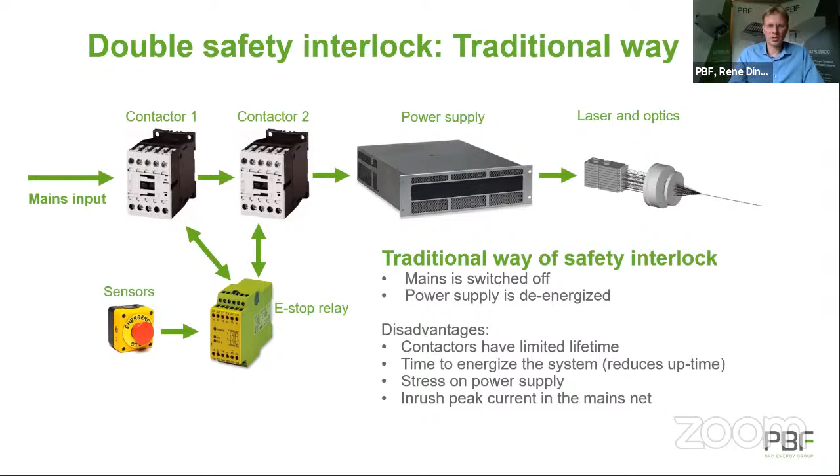There's also the PBF way of the interlock. We have integrated the interlock in our power supply, so you don't need the contactors anymore. And it's even possible to do it without a safety relay because we have the PLe system inside. What are the main benefits? Like I said, no contactors. And you now have a very short time to energize or de-energize your system. This doesn't take seconds, but a couple of milliseconds now. So the uptime of your system can improve quite a lot.

You don't have inrush spikes anymore on the net because the main buffer inside the power supply remains powered. So there's no need for inrush anymore. And like I said, it is even possible to also get rid of the e-stop relay, but that is really dependent on how you build up your system.

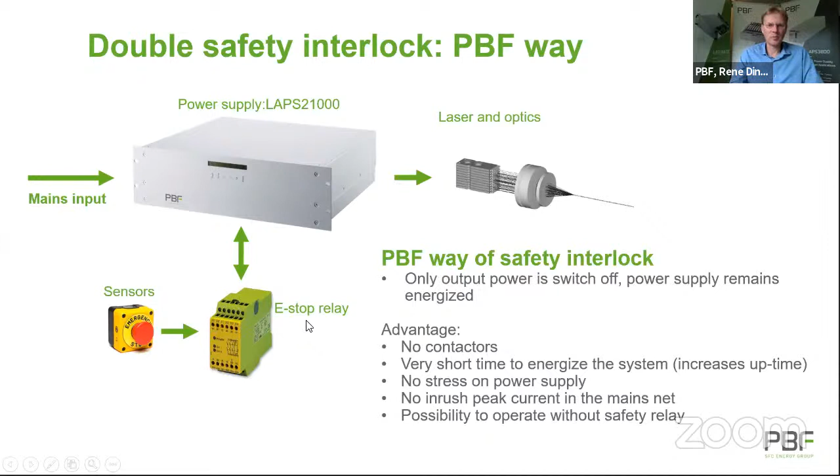Focusing a bit more on a few of our products, for instance, the LAPS 3800. As you can see, it's a base plate power supply, but you can mount it on a water cooled plate. We can deliver it both with or without a plate. It's specially designed for pulse loads, and it has three-phase universal mains. And when we say three-phase universal mains, we mean without any derating. So from 180 volt phase-to-phase to 530 volt, you can use the full power.

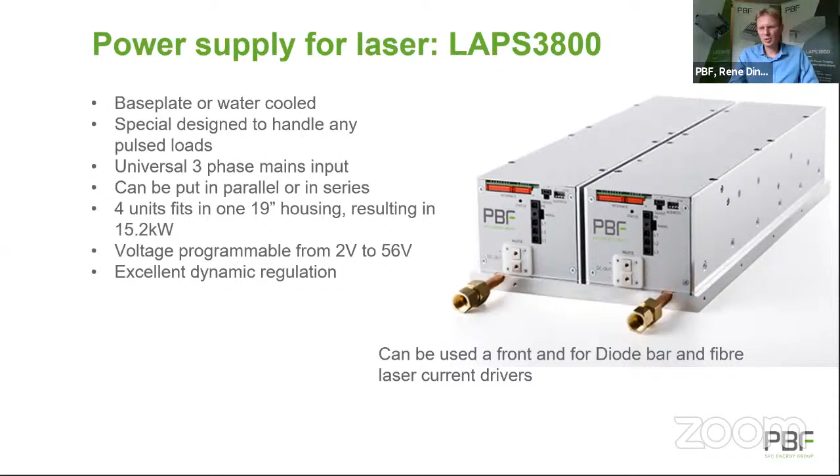You can put them in parallel or in series to either increase the current or raise the voltage. And in this example, now we have two, but if we put 4 of them in parallel, you have in one 19-inch more than 15 kilowatt. You can program the output voltage, and it has an excellent dynamic behavior. That helps you design your own current drivers and makes your design much easier. So this power supply is typically used as a front end, and you have to put your own laser drivers behind it.

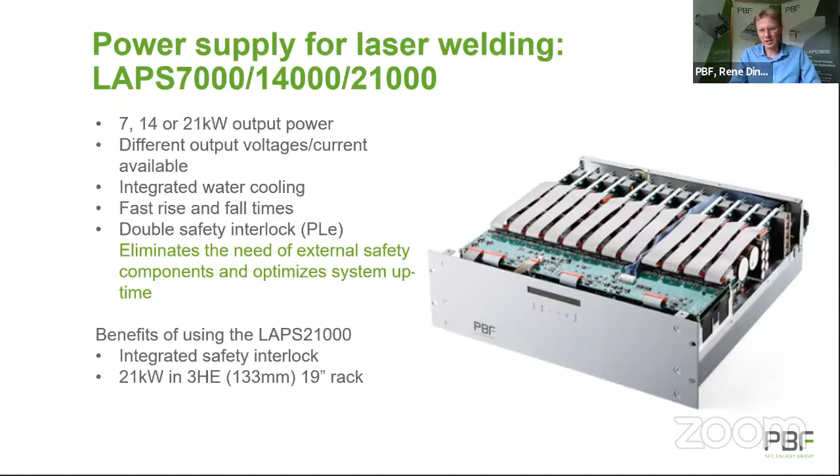Another supply on the other end is, like I showed you, the 14,000 or 21,000 watt power supply. It's available in different voltage and current configurations, water cooled, has fast rise and fall times, and a double safety interlock. As I showed you in previous slides, that can reduce external safety components and optimizes the uptime. So yeah, this is basically some of our products. We have much more, but you can always contact us or look at the website.

And basically now we come to the part where they want to ask questions or not. Yes, very good. Thanks a lot, René, for your contribution. So this is definitely a product for laser manufacturers, so for the core of our systems. So if someone has some questions for René, we can take them, some comments.

So if it's not the case, maybe it's time we could go to OPTOPRIM. We have 2 representatives here, so please don't fight over describing what you are doing. So maybe we start with Stefano, if that's the best choice.

There you are. I would have preferred Christian would have started. Okay, then Christian is in, and now you cannot give the microphone away. No, I will start.

First of all, thank you for hosting this meeting. OPTOPRIM is a distributor of laser components in Europe. We represent some of the other people that are in this meeting, for example Laserline, Univet, and Light, that is not here. So our company, the aim of our company is to promote laser technology. We have in Italy an application center where we can support our customers for applications and get them closer to the process and to the possibility to realize what their needs are. So this is basically our job.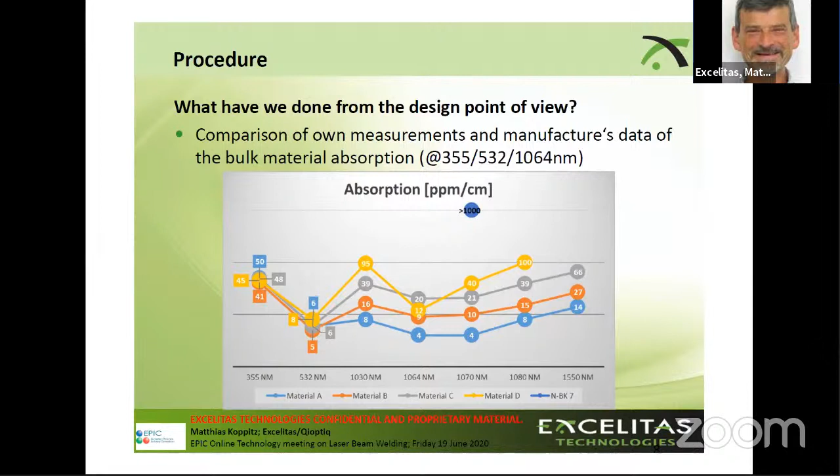At the end, we minimize thermal focus shift, and always have a constant, stable quality over the field, over the scan field, and over the process, over 24/7.

So how did we implement this into our key optic standard products? Key optic standard products for the laser material processing market are, for example, f-theta lenses and beam expanders. So we have adapted our manufacturing processes to the newly selected material. We changed our working papers and so on, and the implementation of the new silicon material in 2019 - we finished it. So all our standard off-the-shelf products are now with this new silicon material.

And this all has been done very price neutral, so for the customer the price is always the same, no changes in the price. And again, the material supply chain is secured.

We're doing further high power considerations at the optics. Two points, two topics.

We talked about coating. So we developed and produced our coating by ourselves in Germany. The influence of absorption and thermal focus comes from the bulk material we heard about before, and it comes as well from the coating. So a very good low absorption coating is necessary. We develop such a coating, but we don't just say it's low absorption - we have an absorption measurement tool in-house to monitor our serial production. Each low absorption coating batch is monitored and tested with this tool. This is not only for 1064 or 1070 nanometers, we are doing this as well for our low absorption coating for green, 532 nanometers.

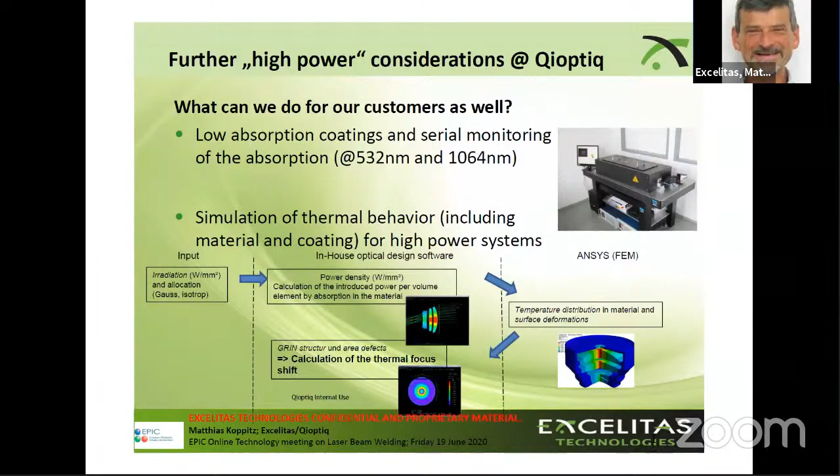Thank you very much, Matthias. That was a really good presentation. I know your next slide because I know your slide by heart - the next one is about the conclusion. I think the story is very clear: we need to collaborate to actually bring these components to different systems. I think one of the best system integrators we have in the room is AMS Technologies. So I'm going to give the floor directly to Torsten to tell us how we can do great system engineering with this component. Torsten, thank you very much for joining us. The floor on this Friday, 5:34, is yours.

Thank you. Hello to everybody, can you hear me? Yeah, loud and clear, hello. Just a second to share... no, here we are, sorry.

In my talk, I want to talk a little bit about deflection and beam shaping for laser welding applications. For those who do not know AMS, I will say a few words about our company. AMS was founded as a distribution company in 1982 for electronics, optoelectronics, and thermal management products. In the last few years, we focused a lot on system solution providing of subsystems for our customers, especially in the photonics and thermal management field.

We have about 100 people European-wide, sales offices in Western Germany, an optics design center in the UK, and an R&D center and some production in Poland.

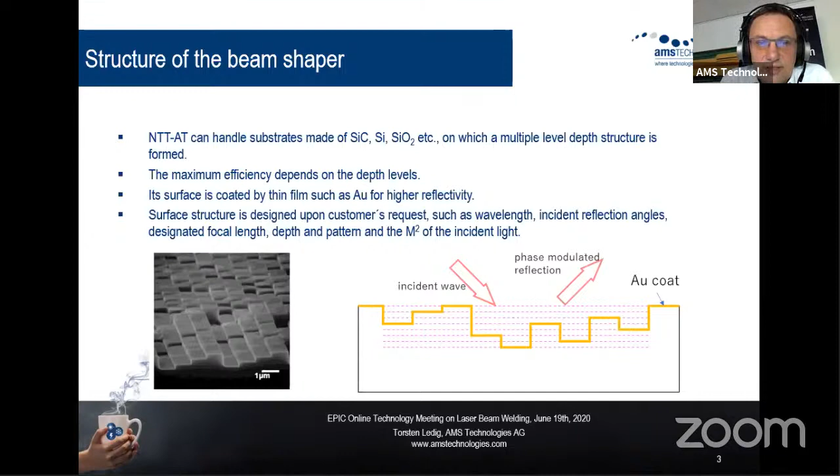We heard today a little bit on different wavelengths which are used nowadays for all the beam welding applications. And it can, of course, be designed according to the designated focal length and the M squared of the incident beam.

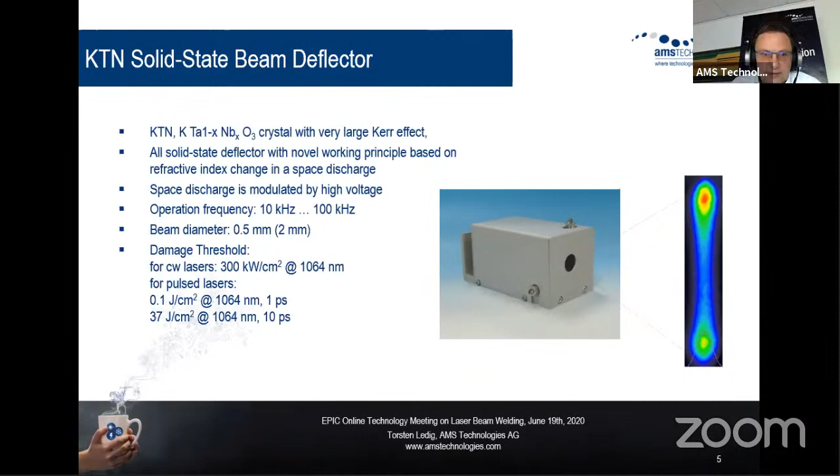And that's it, mainly what I wanted to show you today quite shortly. So now we are coming to the famous EPIC question. What we can do is provide all solid state devices for beam shaping, but also for high-speed beam deflection. And what you can do for us is, of course, we are looking for partners to industrialize these devices, partners who are willing to test such devices.

And you're looking for partners to test those devices? Yes, really. Oh good, this is great, because we want to test these devices in Spain, right Pablo? How can we test those devices, Ivan? Tell me, yes, I'm very, very curious about the solid state. Every time we hear 100 kilohertz, we get excited. We love to explore speeds, and we have some needs for very precise hitting, with 100 watts could be a good power level. Don't worry Pablo, don't worry. Just show us, we know what you want to tell us. Just take the slide, take the floor. 100 watts is suitable, this is experimentally proven.

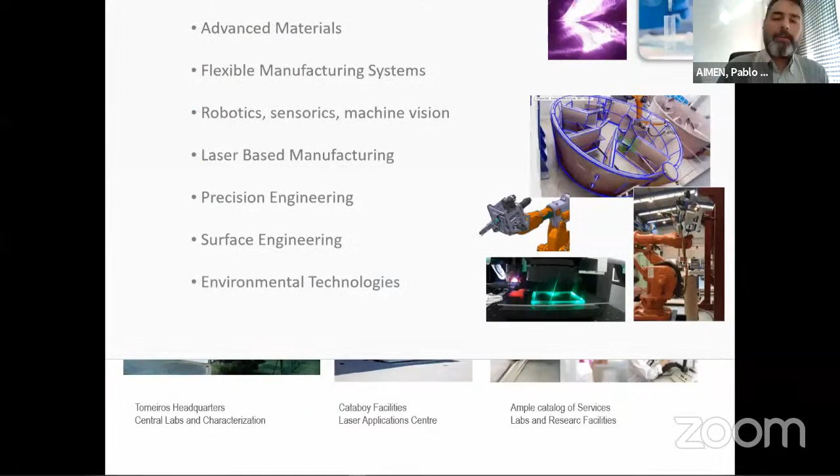And also, since we are growing and growing in European and international activity, we are more and more known for our labs, testing facilities, and the Laser Application Center, which is a special facility we have dedicated exclusively to laser applications, with, I think, 20 different types of laser sources right now, and all kinds of robotic, CNC and other types of equipment. But we have a broad range of offer.

Our expertise builds from physical metallurgy and welding and materials knowledge, and we build from there a knowledge on process monitoring, control, automation, robot vision, machine vision, and mechatronics.

And we started with laser welding some 17 years ago with the first solid-state welding PSA application. And from there, now we have it all, from large scale, several square meter laser-assisted tape laying for aerospace, down to nano lithography made by laser, 3D lithography with multiphoton polymerization. We cover all that. So we love laser welding. We love all the technical details that were mentioned now, but I was invited here to talk about something completely different.

Instead of ourselves developing research and new applications as we normally do, we want to offer our capabilities and the capabilities of the top research facilities in Europe to companies willing to test new laser applications, especially SMEs. This is a project that was recently granted, Project Pulsate, which is a project on coordinating the research facilities in Europe to connect technology providers and technologies and make assessment experiments.

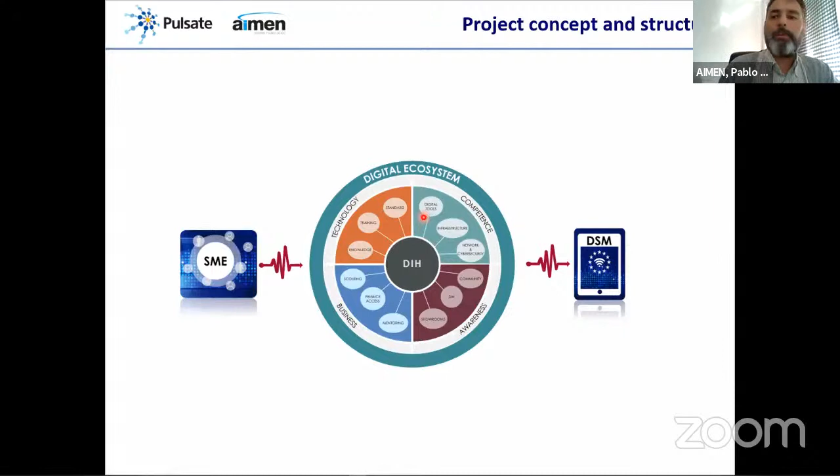And we want to be that GPS he mentioned before. Normally digital innovation hubs do this work of connecting SMEs to the digital single market by covering a number of digital competences. But normally, digital innovation hubs know a lot about cybersecurity, about digital software deployment, things like those, but they have no real knowledge about laser technology and implementation in manufacturing.

So we want to connect many digital innovation hubs in Europe and reach through them nearly all the SMEs and manufacturing companies in Europe which could need laser manufacturing as a digital key enabling technology, but are not able to implement it because they don't have the capabilities to test in their environments.

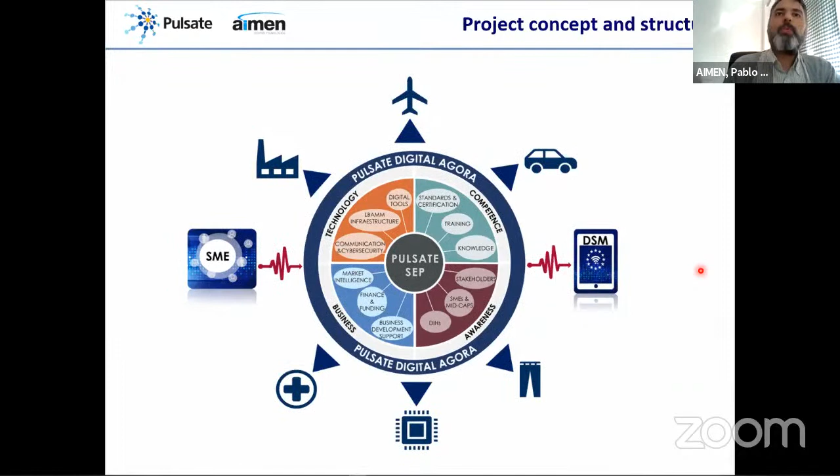So we will connect ourselves, also Fraunhofer, NTC, SINTEF, CEA, and the Laser Application Center in Vilnius, all of them high-level laser application and digital manufacturing centers in Europe, supported by EPIC. Also partnering with us are Funding Box, experts in mentoring and deployment of technology, and a company specialized in digitization of technologies. So we build on lots of previous experience and a connection to 74 digital innovation hubs in Europe, to networks and the pan-European ecosystem.

I don't have time in only a few minutes to explain how we will work after the project, but I can explain in 1 minute what we can offer during the first year of the project: opportunities for European-funded, fast and simple tests of laser equipment. We offer our own testing facilities, our knowledge and our implementation models to test the feasibility of new equipment, like new laser sources, heads, measurement devices and so on, through two types of experiments.

For example, we have an increase of quality, so we have no cracks in weld seams, and this also applies for alloys that are difficult to weld, such as nickel-based alloys or aluminum-based alloys. And pores, on the other hand, are next to non-existent. We have the avoidance of spatters. So if we have spatters, they are so tiny that they don't adhere to the surface of the weld. We have the avoidance of vapor deposition on the surface, and we have no oxidization. This is very beneficial in terms of welding, for example, stainless steel for fuel cells.

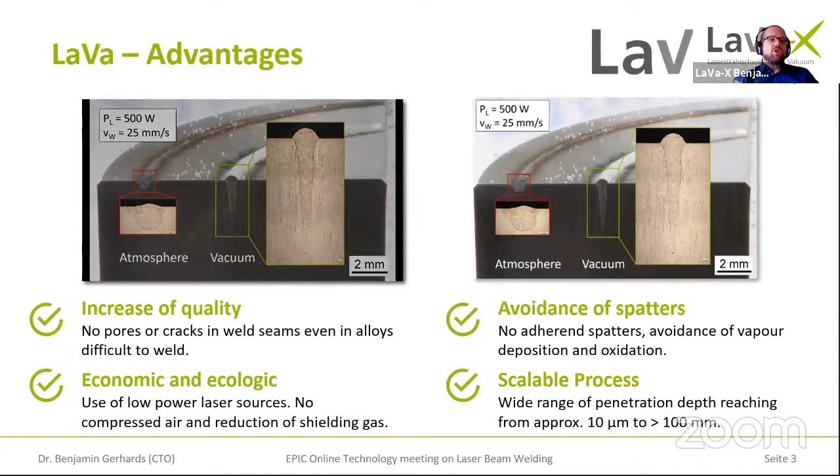Furthermore, we have a very economic and ecologic product over here, because we can use low power laser sources. So as I mentioned before, our laser sources usually just go up to a power of 2 kilowatts, which is very beneficial for the money that you need to invest into our products. Furthermore, we do not need compressed air, and we have a significant reduction of the shielding gas consumption.

And last but not least, here we have a very scalable process. So we can reach penetration depths from approximately 10 microns up to more than 100 millimeters. So we are in no way inferior to electron beam welding at this stage. So all benefits from laser beam welding and the benefits from electron beam welding with nearly no drawbacks, except for maybe the size of the vacuum chamber.

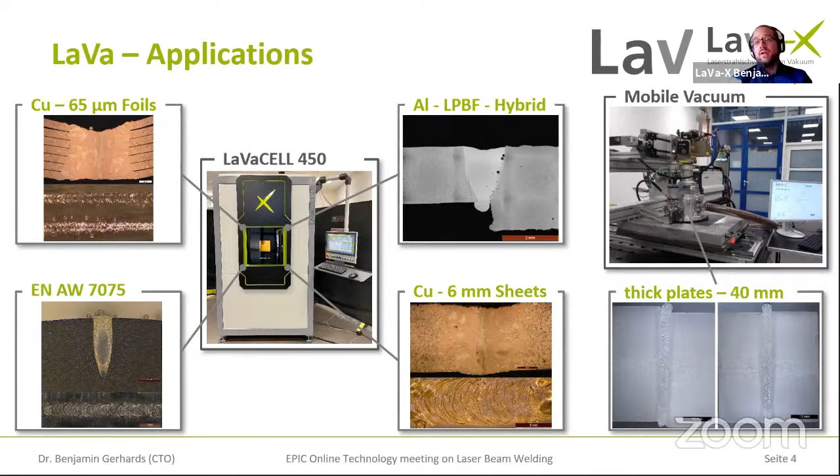Thank you so much. It's been so great to have this as a closing, when we have everything put together and then you have the station to actually combine. For me, these kind of meetings are great because all of you are really gonna connect. I actually took a lot of notes today. We talk a lot about laser beam monitoring and the need for coatings for the beam monitoring. We talk about laser beam welding of different materials, and that for me is like the biggest challenge.

And we talk about aligning the beam as perhaps something to talk about with the automation for manufacturing machines. We talk also a lot about laser heads. I love the presentation from Precitec. Markus, you were the star today. If I had to give an award, it would go to you. I think there is a lot of room for collaboration, especially adding new imaging technologies. And there is NIT from Madrid, actually. They have something where collaborating with you would actually benefit both sides.

Laser optics are still always the coolest part that we have in EPIC. I think we have the best laser optics in the world now in our community, so any challenge could be actually addressed. High power FBGs, we really loved the presentations from Civan, also the comments from iXblue. A combination of different colors is something that we didn't address enough, and I think there is a lot of room for collaboration there. The power supply was addressed by PVF.

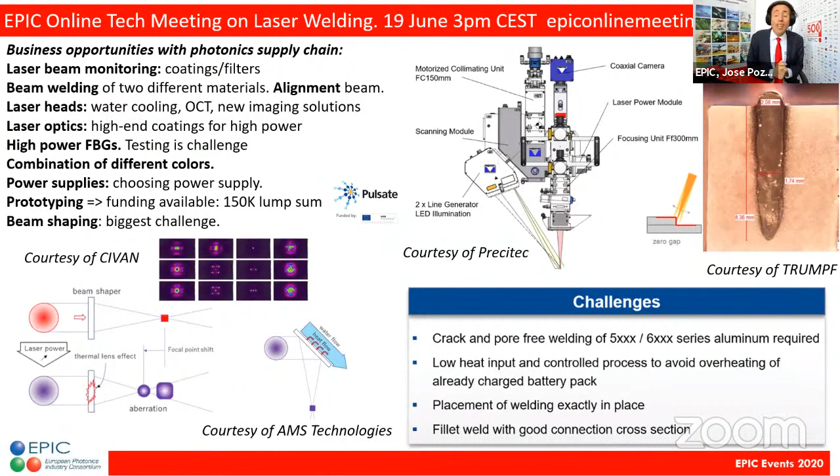The prototyping, I want to remind this, Pablo has a lot of money from this industry and he's willing to give it to us. So any challenge, go to him. We're going to do something fantastic with this new initiative called Pulsate, and the beam shaping. I love the presentation from Civan. It's fantastic what you can do with the spatial light modulators, out of this world. I really tried to summarize the most important parts.